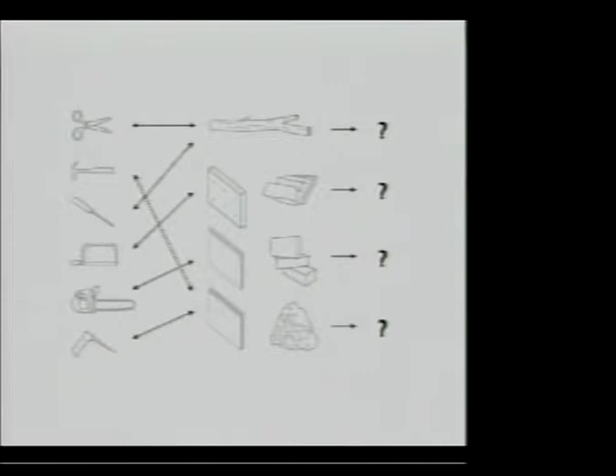So the way we're working, and this diagram kind of illustrates this idea, is looking at tools, new tools, both analog and digital, and looking at how tools might affect materials, whether that's raw materials or pre-manufactured materials, and how that might inform or lead to an architectural conclusion.

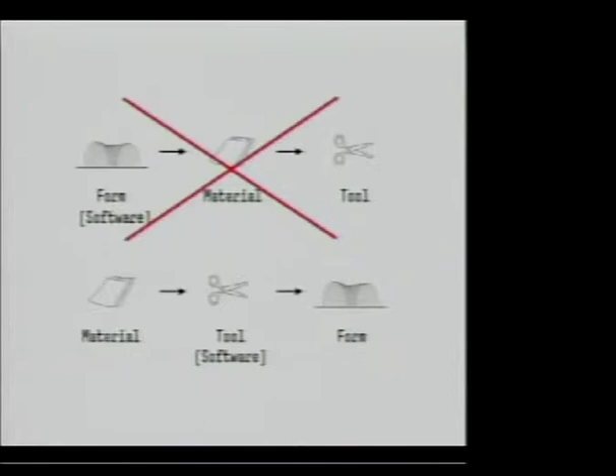When we came out of Harvard GSD in the late 80s, early 90s, software was really very much about using it to make form, and somewhere down the line there would be an idea about how that would be materialized, and then what tools would lead to that. So in more recent years, we flipped that equation: we'll begin with a specific material, look at tools for transforming it, then relocate software in that position, and see how that might formalize or lead to a spatial result.

One of the places we started working in the late 90s was for the Trumpf machine tool company in Stuttgart. Trumpf is the leading machine tool company in the world. Their idea was to use lasers, specifically for cutting and shaping sheet metal. So while we were master planning for this company and building individual buildings, some of which I'll talk about a little bit later, we began to look at their technology and how we might apply that to producing architecture.

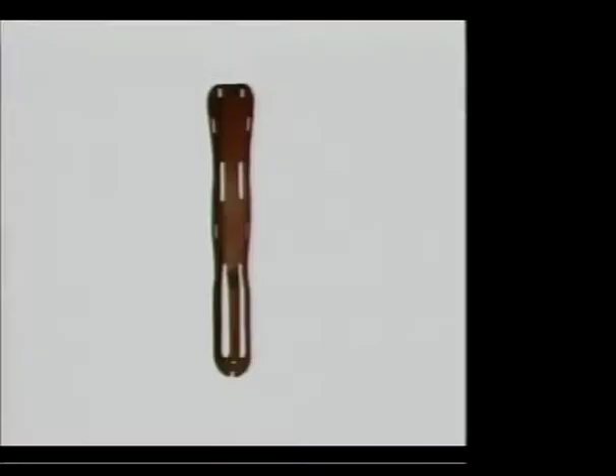So in this case, this is a 5-axis laser cutting head. It's cutting a gas tank for an Audi. So we were wondering, are these machines that we could start to use in terms of producing initially architectural components and in later years more substantial cladding systems, structural systems, things like that. This image of the Eames splint here was a kind of project that we always like, and we show this often in lectures.

You'll probably know from your history, it was the Eames splint. It was developed during the 40s, during the war years, out of the relatively new technology of plywood. Plywood could be formed to produce the splint. But in a way, this piece set up the rest of their entire project in terms of producing furniture systems for the 50s and 60s. So this we liked very much.

Again, I think the way we work in the office is, we're working with students, but it's, I would say, relatively flat hierarchically, where students will come into the practice, will bring software skills, scripting skills, parametric issues. We're looking at ornament, geometry. And again, as a kind of evolving practice, we're constantly looking at technology, looking how we use it. So in that sense, we're very much open-ended in terms of how these might work or be used within our practice. One idea that we start doing also with students is this idea of active archiving.

So what active archiving was for us was, rather than relying on, say, building catalogs for our work, we started producing our own architectural building systems. A couple of years ago, we had a show at the Architectural Association in London called Atlas of Fabrication. It was a catalog for the show, and at the same time, it was an exhibition showing some of these techniques, some of these components that we started to produce. So the catalog itself is a very simple document, basically stapled together, where we could add some of our systems into it.

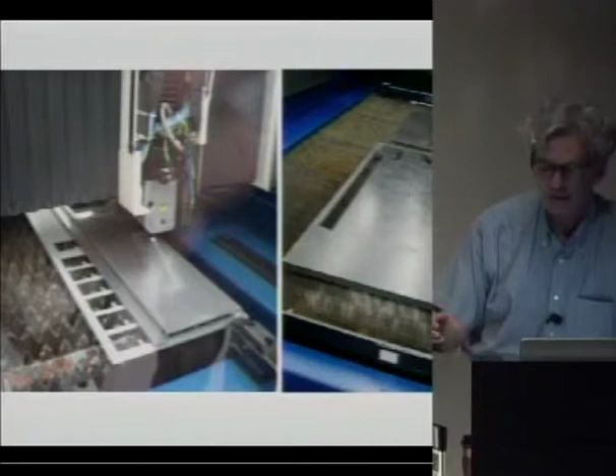So, and I'll go through some of these examples fairly quickly, but another question was, in looking at these tools, we would send, in these examples, students down to Stuttgart, where they would look at a particular machine, understand what that machine could do in terms of a kind of action on a material, in this case, cutting, stacking. The first machines are fairly fundamental, where they're doing two-dimensional laser cutting of sheet metal. With these machines, in a sense, we would study these, see what the capacities were, how fast they could cut, the economics of using these tools, and then to apply these to a system.

So, and these first examples are relatively simple moire screen systems. We began to apply digital scripting to these surfaces, where there's this idea of a system that can be repetitive, at the same time have a certain amount of variation in it. So at this point, the scripting is fairly naive. It's simply producing almost what I would call kind of ornamental pattern making that we could start to think about in terms of architecture.

Another thing we work on in the European scene, I guess, is architectural competitions. We're constantly doing architectural competitions. At the same time, win, lose, or draw, we like very much the idea of having particular research projects as part of the architectural competition. So in this case, we had an empty site over here in Dresden. As you remember from your history, Dresden was this beautiful Baroque city that was largely destroyed during the Second World War. It was a city built of a very beautiful sandstone. So the idea was to, in a way, reconstitute a historical form in the site of this Gewandhaus near the center of the city, but tectonically to think of it very differently in terms of how it would be built, the physical walls of the project.

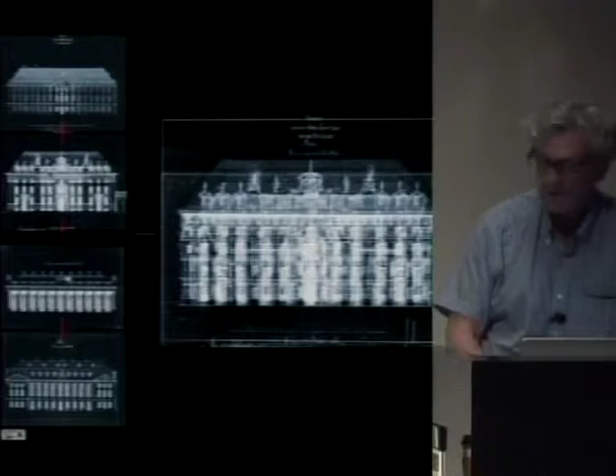So the exercise was, we basically looked at all the proposals for that site from the last 200 years, which are these guys on the left, and then sort of composed those into, on the right, this kind of composite form, which became the proposal for the scheme.

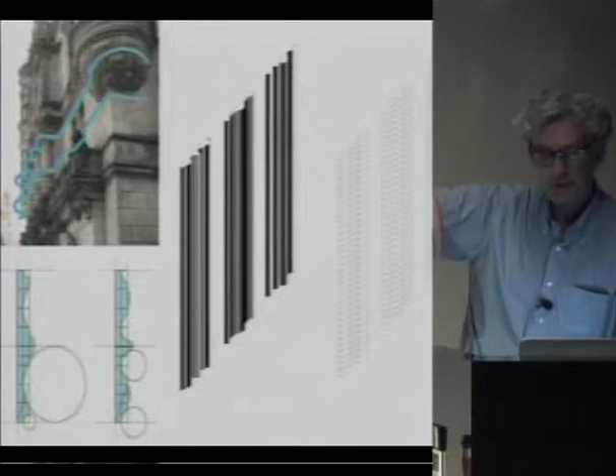I mean, something we also like is, in a sense, an idea for generating an architecture on the site that's not something we simply drop into a site, but has to do with the history of a place like that. We looked at the surface profiles of the Baroque walls in Dresden, and in the lower left began to look at these templates that could be a stacked wall surface.

So the first studies were of these kind of Baroque but relatively abstract walls that could be made almost like a series of louvers of digitally cut stone or concrete that would stack to form these kinds of walls that then later could constitute the construction for the building itself.

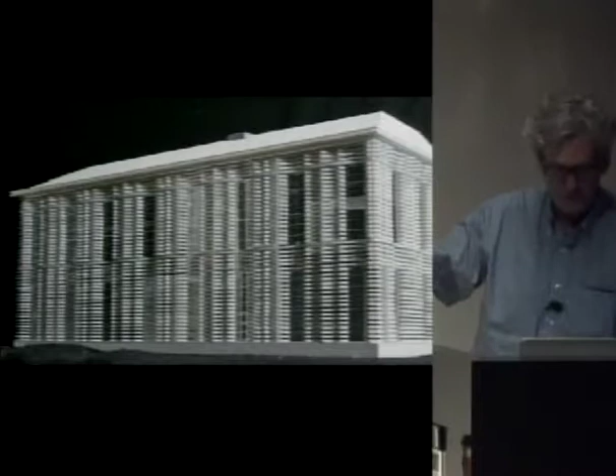So the building itself, again, is sort of both familiar and unfamiliar. Familiar as a historical form in this historical city. At the same time, it can appear completely opaque or completely transparent through this kind of louver system of wall making, using our research to inform the making of this project for a competition proposal.

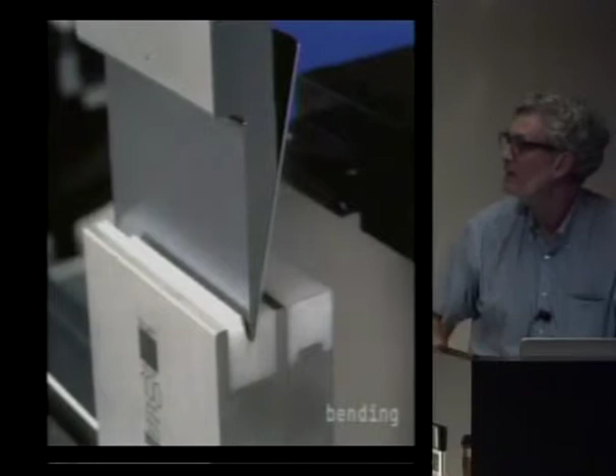Another area, and this has been around for a long time, is bending. Bending is an old technique for shaping metal. Like many of these other things, it's now a digital process where, again, these are MIT students. They had discovered with a limited sheet of metal about this big, they could get a certain amount of folds. Those pieces then can nest into larger arrays or matrices of surfaces.

Again, completely independent from any particular use or client or utility or even economy for using these, but just trying to understand how we could use this machine to produce a surface like this.

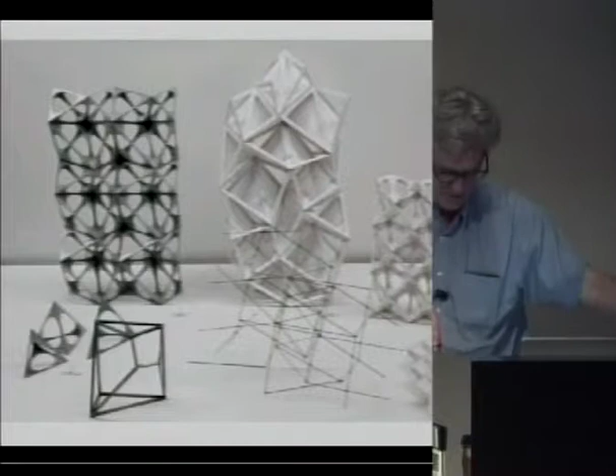This piece then later became part of a research project, part of another competition in Zurich for the Kunsthaus, which is the addition to their modern art museum, where we were really interested in revisiting the space frame as a kind of structural idea for facade making. Now, space frames have been around since the 50s and 60s.

Now, digitally, a space frame could be something that could vary, it could change in relationship to structure or daylighting criteria. So, in a way, again, this was the research project within the competition project, and we started to produce these in our workshops, digitally cutting these, and then assembling, and then bringing structural engineers in very quickly to start measuring these systems to see how they might apply.

Ultimately, this was a proposal for a curtain wall at the museum entrance, where you have this kind of interstitial space at the entrance, which has its own climate, different than the galleries, which are stacked to the right, in terms of humidity and temperature and all these things, as a kind of wrapper and envelope around the entire space, which ultimately in the final version became a concrete precast perforated surface that wrapped around the entire building.

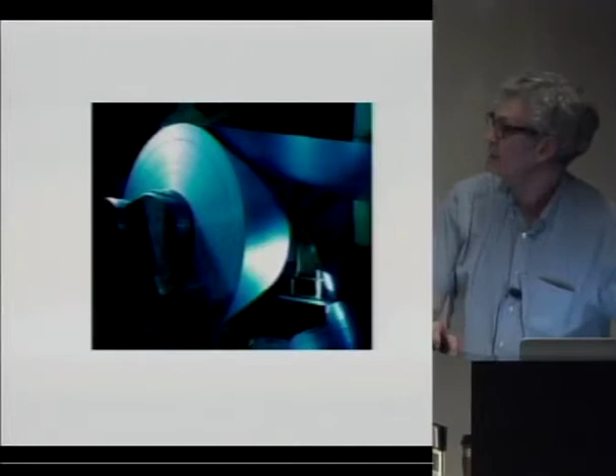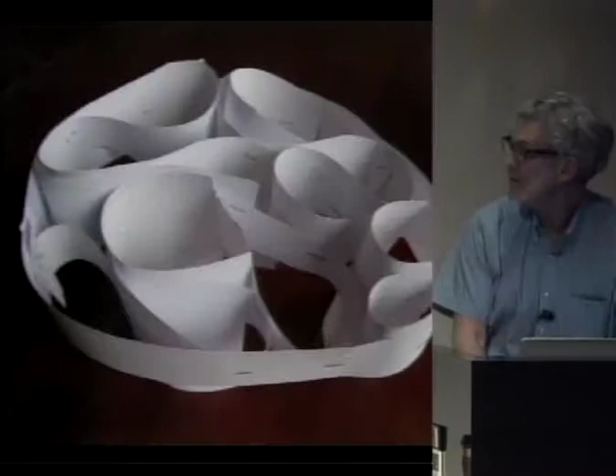And other studies, and some of these were started also with students, were, for example, the discovery of meter and a half rolled sheet metal that by simply looping the material and fastening it by welding or riveting, we could produce a kind of architectural pavilion.

So in this case, by making more dense coils, you can get a much stiffer structural roof. It can get larger and drop out as these kind of structural columns. We even combined it with a kind of curtain wall of plexiglass, which follows that.

But again, looking at a particular material, then looking at a technique for, in a way, organizing or collecting that material, that for us had a kind of logical process in terms of leading to a system that could be both structural as well as having an idea for lighting a pavilion space. Again, completely independent in this case from any particular site or program, developed as a kind of prototype.

Another example, here we're working with a Swiss structural engineer, Jürg Conzett, and Jürg's idea was to use structural depth. In this case, this is a large box beam that can bridge from left to right with these kind of squiggle walls, which are a webbing.

These would be cast in a digitally shaped concrete formwork, and the height of that box beam, which is about 3 or 4 meters, then could be used as loft spaces or office spaces, again a structural idea, but of a kind of dimension that you could use as an architectural project.

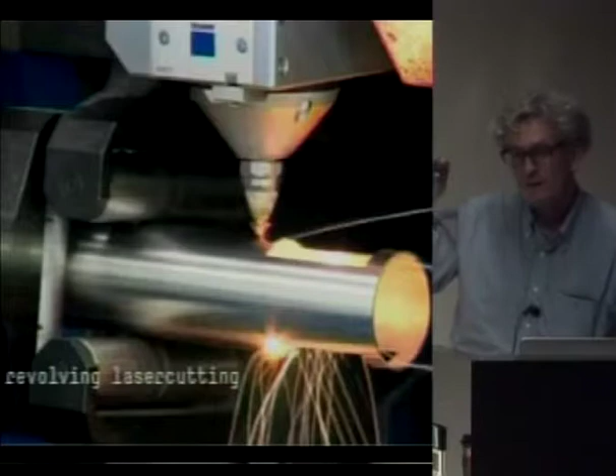Revolving laser cutting is relatively new technology. I really like it because all of a sudden now you have a three-dimensional, off-the-shelf piece, these tubes which can be rotated and then fed through a machine and cut. The first pieces were these highly intricate work pieces. We could cut multiple pieces from one tube section and just ran these to see how precise we could make them, how quickly we could cut these things. Again, independent from any particular use for them.

Another area that we're working in is this idea of the architectural exhibition. And we like architectural exhibitions a lot because they're sort of in between the research work and the building projects we're doing. And what's kind of nice about exhibitions is, unlike a lot of our contemporaries, we're not really working in shows that are about showing drawings and models so much, representation, but more really about using them for architectural installations, so that they are forms of architecture in their own right.

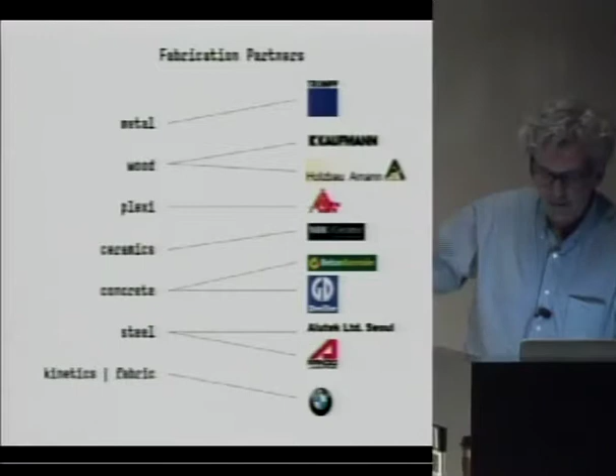With those institutions we started working with, we had begun with Trumpf at the top as a fabrication partner, and in the meantime, we keep collecting new partners, new workshops basically, that work specific materials in specific ways. It's an evolving collection that we keep adding to for working on these projects. A lot of these are around where we're based. We're in Berlin, which is, I think, marked at the top. Between Berlin and Zurich, we have about 12 or 14 of these workshops that we work with continually, depending on what the project might be.

So this piece, which is kind of a sculptural piece, had an idea of rotating these tubes in this array, again thinking about an application which ultimately became this. We ended up putting the tubes in a project for a showroom in Sweden, where by rotating the tubes you could do a number of things. You have this visual effect, a moire effect. We started looking at it in terms of exterior sunscreening, which is what we do in Europe a lot. We could look at the transparency or opacity looking into the interiors of the showrooms. So for us, that was a logical series of steps in terms of looking at a tool, a material, and how that might lead to a more inclusive architecture.

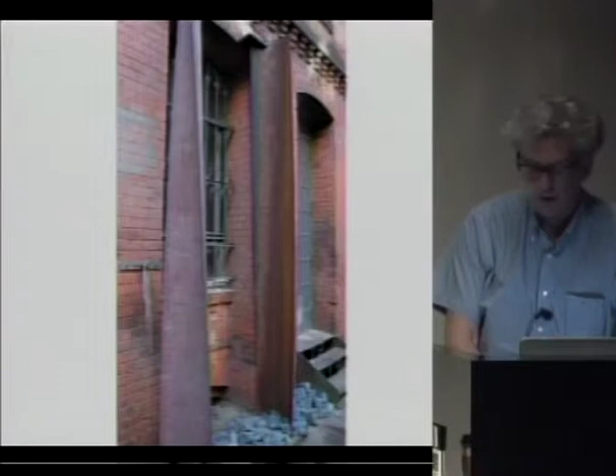Then we started producing these in our courtyard, our studios, out of Cor-ten. So we cut 3 pieces from each tube. These would go up 22 meters. But bring the client to our studios, show him these things, tell him where they could be cut, how much they would cost, how long it would take to make them and deliver them to the site. So in a very precise way, for a system that is essentially unprecedented, show how we could use this and apply this to an architectural competition that, in this case, we actually won.

The prototype as an experiment, I think, comes back. This is one of our student projects from the AA in the late 90s. This idea of a search for an architectural prototype that comes from a technical system. And I guess this is kind of a fancy way of simply saying that for us, design follows technology as we discover it and find ways to use that.

Again, a lot of this has to do, like in some of the earlier examples, with the engineers that we were working with. These are a lot of English and German engineers that we work with. Also, and I think to say up front, we'll usually start a design process with our engineers at the initiation of a project rather than something that happens further down the road.

A couple years ago, we were asked to do a pavilion for the German Architecture Museum, a temporary pavilion in their garden space. We teamed with Werner Sobek, a very talented structural engineer in Stuttgart. We discovered by scroll cutting these tubes, you could have very complex radiuses. He said, if you want to make a kind of arch out of these things, it's really a terrible idea because these are like limp noodles, basically, and don't do anything. But he was recommending that we could do digital bending to produce these forms with a simple bending machine that's digitally guided.

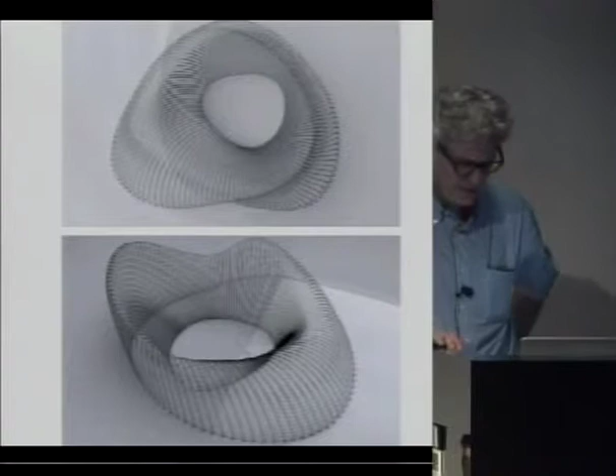So with our students, we started looking at different proposals that use a specific size tube that can be radiused in a certain shape that could produce these pieces where each arch could be a unique piece in the array. So we ended up settling on this one, which the curator picked because of its flexibility and the kinds of exhibitions they could have in it for 6 months.

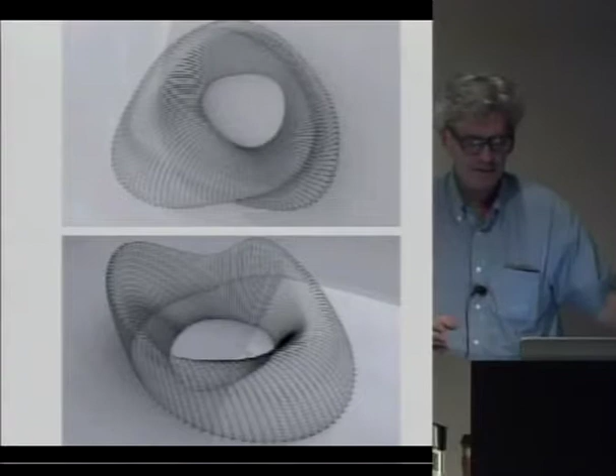But it's also, I think, the pavilion, and we've done several pavilions with students, is an interesting type as an experimental typology. It's fairly open-ended programmatically. They're usually temporary, but we looked at a number of these in terms of more architectural and experimental building typology.

So in this case, we had a kind of primary and secondary structure that would hold it together. With Sobek's office, we started to look at a shingle for this. Using scripting, I think we limited this to about 12 different shingle types. They clad over this arch. So even though the recession came, we ran out of funding, the Deutsche Bank pulled out of this, but we were still able to build the pavilion inside the Architecture Museum and show it, in this case, as a one-to-one mock-up.

So here you see these Makrolon, which is a kind of synthetic plastic shingle. They overlap so that in the summertime the pavilion is ventilated. We could silk screen on these surfaces to give more sun screening, and we could also embed photovoltaic cells in this to generate energy for the pavilion for the 6 months.

Then even in the course of the weeks that we put this thing up in the museum, we were improving details. Like this is a simple wire connection to the arch, which we then attached a Velcro connection. So you could take these shingles and just sort of pop them up and onto the frame in a very, very quick fashion.

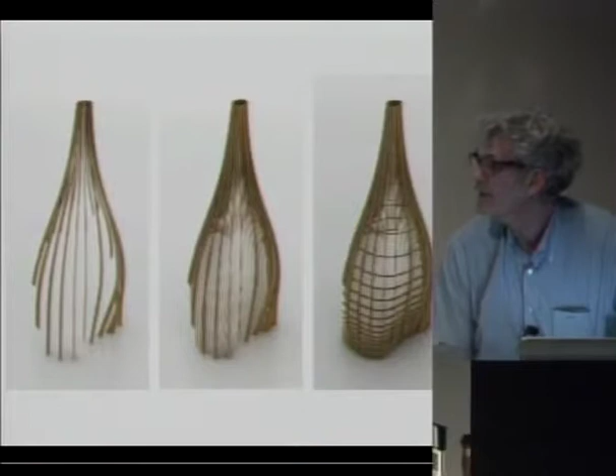In this case, we looked at the Norwegian wood industry, which is a really fantastic material. We use it. It's a really very good sustainable material. It's easy to work. In this case, the sort of core cell piece is a series of wood ribs. These ribs can be added with secondary pieces. We could make entrances into these spaces. We could use the structure and then clad it.

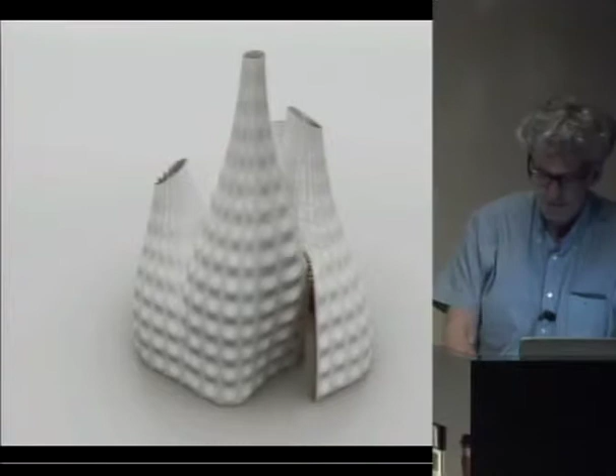In this case, this is an ETFE. These are sort of these membranes of a kind of chambered plastic membrane that wrap around these things in terms of insulating and also conditioning the light that comes into these.

The rib system we were able to use for displaying some of the artifacts, some of the pieces that Cecil was bringing into it, as well as daylighting the spaces, and then finding a way where we could, as a series of modules, every year, add a new cluster to this thing until it's all essentially built out in 5 years. So again, looking at the pavilion as a type, in this case, to look at wood construction and how that might contribute to building that.

The second half of the lecture I wanted to talk about was our work at a kind of building scale. This idea of a research practice. This soundbite from Icon magazine from a couple of years ago was the idea and the kind of desire from our point that the work we do, and the work we do is really sort of everyday office buildings, factories, cultural buildings, but the idea that the technology that we're using is something that we can use in everyday kind of construction situation. That means economically as well as practically on these kinds of projects.

So if this is the way we've been working in terms of research as related to, say, things like exhibitions, to buildings, ultimately it's our building projects that are conclusive in terms of discovering ways for using this kind of technological research. So in this example for smart materials houses, we wanted to look at how we could use material research for the production of low-income housing for an IBA project outside of Hamburg.

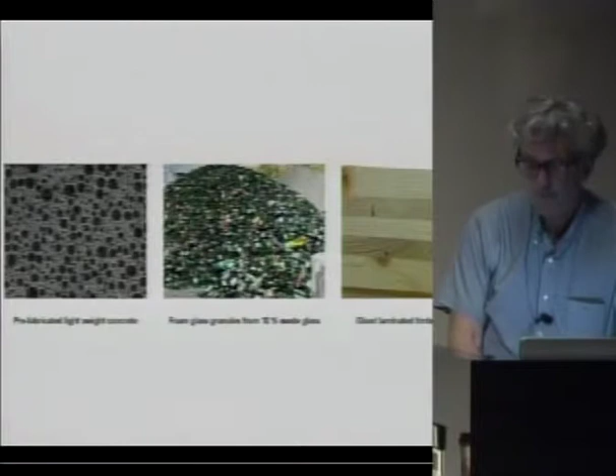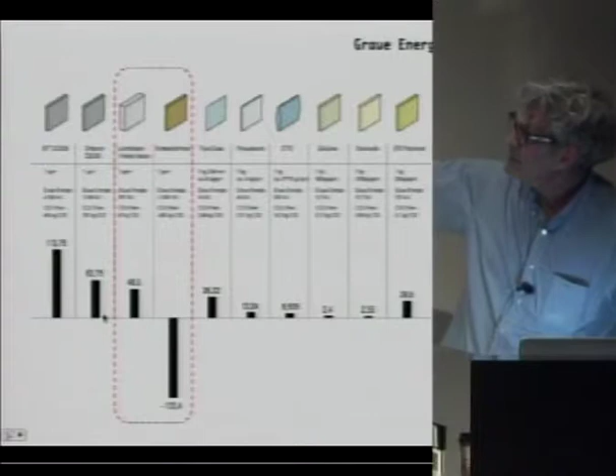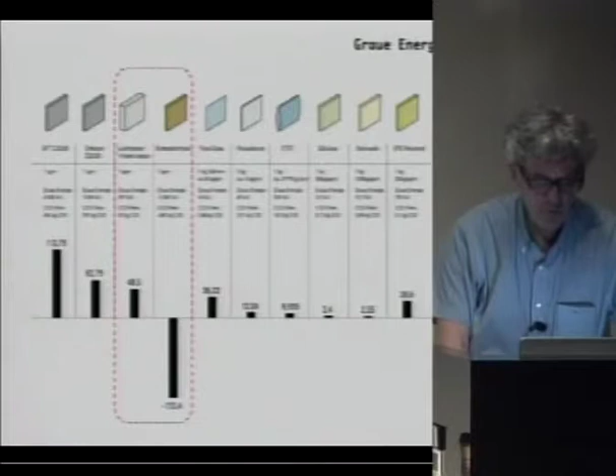So this kind of CO2 chart was a way that helped us construct an argument for which materials we wanted to use. So if you look at the concrete we use, and if you can't read German, you can see that it's about a third of the CO2 of regular poured in place or precast concrete, and then with this sort of minus CO2 use of the wood in combination, they were a pretty attractive couple of materials.

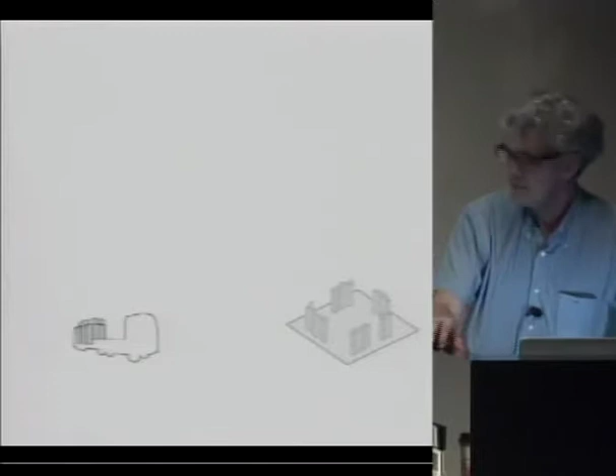The other idea about the apartment building that we liked was the fact that it could be constructed really quickly. You could bring the pieces on site, almost like a house of cards, and within a couple of weeks have the entire system constructed.

We liked also, working with our energy engineers, that if you're going to work with concrete, it might as well be expressive. It's a very plastic material. It can be shaped in a very sculptural way. So because of our earlier fabrication work, we knew we could make formwork that in this sense is kind of a scalloped surface. You could produce a form.

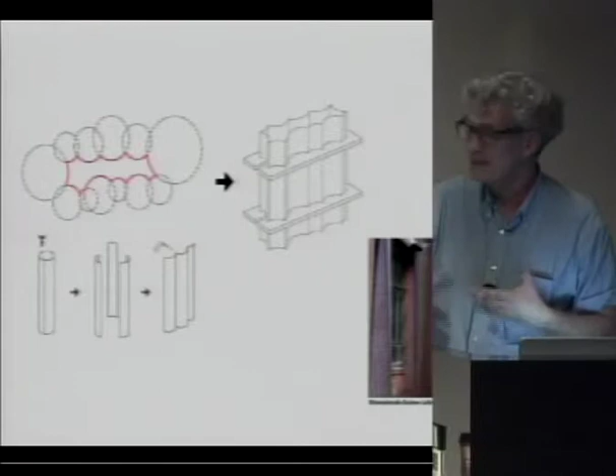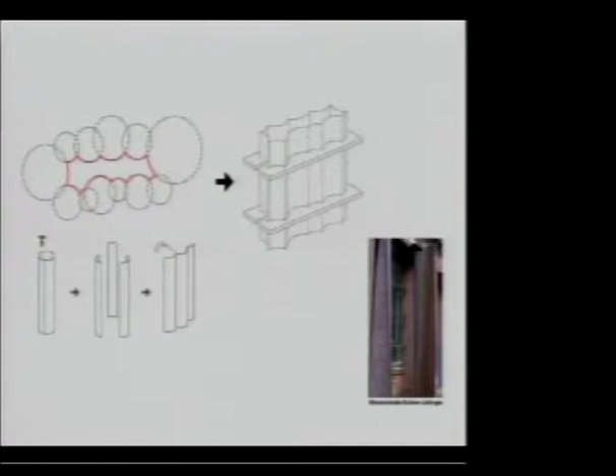And because the material is homogeneous, there's no finishes on it. It's not a sandwich system. You can make one type by pouring like this. By flipping it on its head, you can have a different type. You have different types by pouring the concrete higher and lower. And that would produce this component, this concrete piece, which is very much this kind of multitasking element.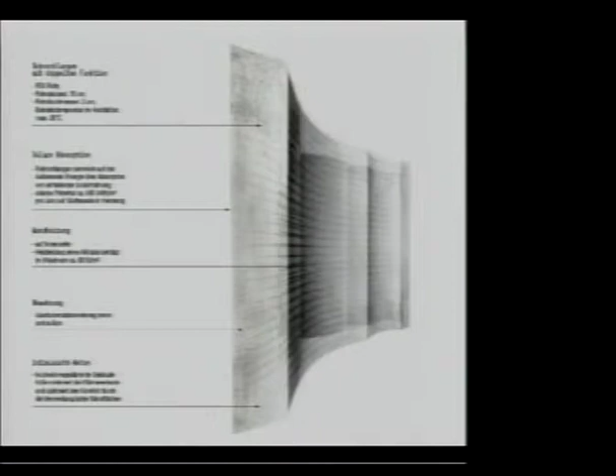It's pure infralight concrete. The finish can be the inside or the outside. We put a series of conduit in it, which has hot water or cold water flowing through it. So that's the heating and cooling system for it. We formed it so it was a self-supporting element that could be stacked on each other. We didn't have any of these sort of German cold bridge problems with the insulation of it.

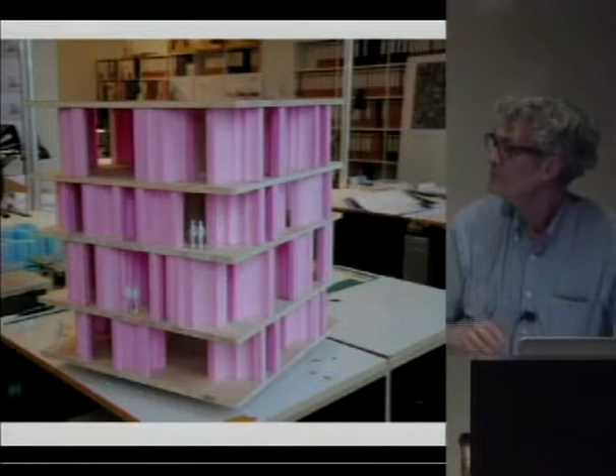And then in our shop we started to build these models in 1:20. In this case, we took rigid foam, which you can cut with a hot wire, and then combined it with these plywood sheets. So in a way, the model duplicates exactly how we would construct these in reality by simply stacking these pieces up.

And because of this aspect of it being self-insulating, the facades can move and shift over as long as structurally they align with each other and the loads come down. We could do a very dynamic facade in relationship to the floor plates to generate exterior spaces along the perimeter. Again, these are these kind of little pocket terraces on the outside.

So you have a core, which is wood, also on the interior. The units can be organized as open loft spaces, or they can be divided into more conventional sleeping rooms, living rooms, kitchens, and could sell for a very low price to the people who live in this community.

It was an idea that we went crazy with, and we tried an even crazier version of it in this version. In the last year, we discovered that you can build, probably in Holland and definitely in Austria now, high rises up to 20 stories in wood construction. So we thought this would be an amazing idea if you coupled the wood construction with the infralight concrete as a kind of stacked system.

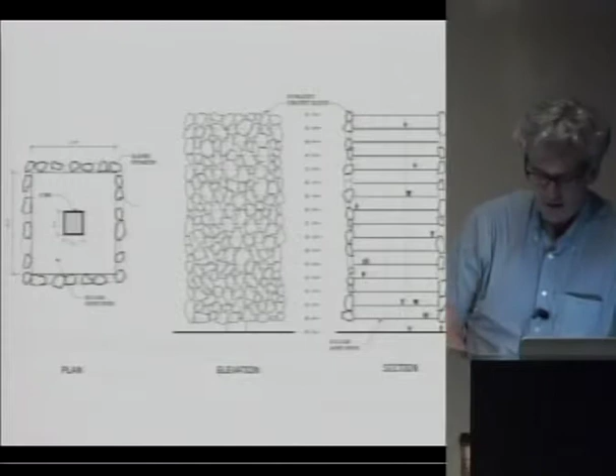The idea being that these blocks, you could just sort of bust them off and bring them down to the site and then begin to stack them and then connect them into these wood sections. Because the material, again, the thicker it is, the better the insulation quality is. At the same time, we're really interested in the idea of how it might affect the daylight coming into this deep building section as we're showing here.

Another idea that we looked at for an infill project in Berlin was another structural idea, also working in wood construction, of a kind of catenary idea where these are work-live units where the box cells work as a catenary structure, which is this kind of chain idea. So the slipping has to do with that structural friction between those.

What was cool about this project is by bridging that space, you would get essentially a completely column-free space underneath that, which could be used as a workspace. So we can develop something like this and then look at it as a kind of development project for a kind of empty site in Berlin with two party walls on the left and right. And this is a kind of insertion project into something like this.

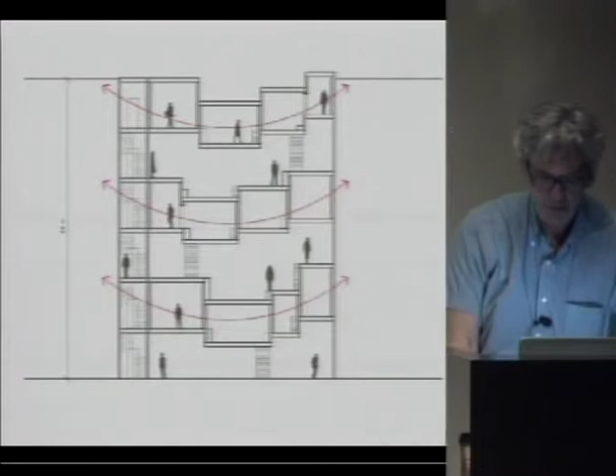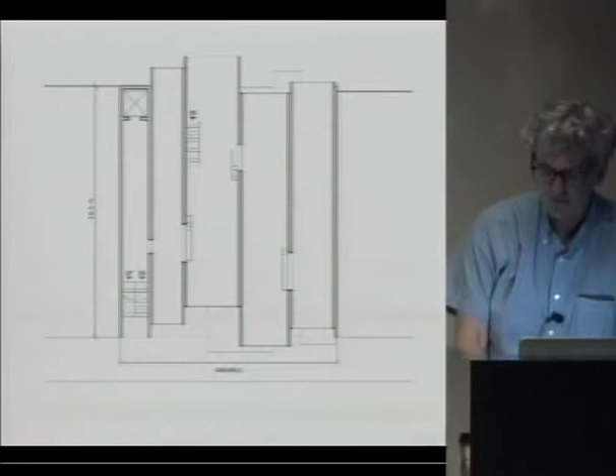So in this diagram, this is showing the structural, this sort of bridge hanging idea of the kind of residential bits sandwiched in between the open working spaces. So again, a kind of structural idea, material idea leading to a prototype that could easily fit, also by definition of code and exiting, into a site for Berlin.

The last few projects are construction projects. Trutec Building was a piece we did in Seoul in Korea. We'd never worked in Asia before. We've been used to doing these competitions in Europe. The context we knew very little of.

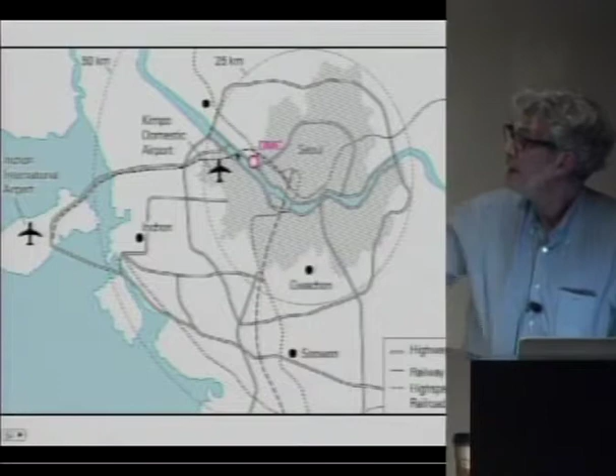It was in one of these last development sites in Seoul called the DMC at the north part of the city. Seoul, as you probably know, is this very heterogeneous city of high density, low density. It has this pretty dynamic landscape that's rolling through it. This amazing sort of crazy graphic image of the street by day or night.

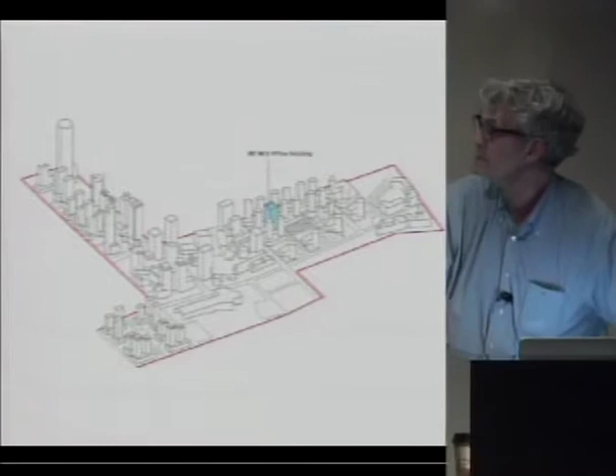They're a 24-hour city. And what happened is we inherited this site within this kind of master plan that to us was generic. Not much of this had been constructed. For us, it was difficult to see how we might work into a site that for us had very little context.

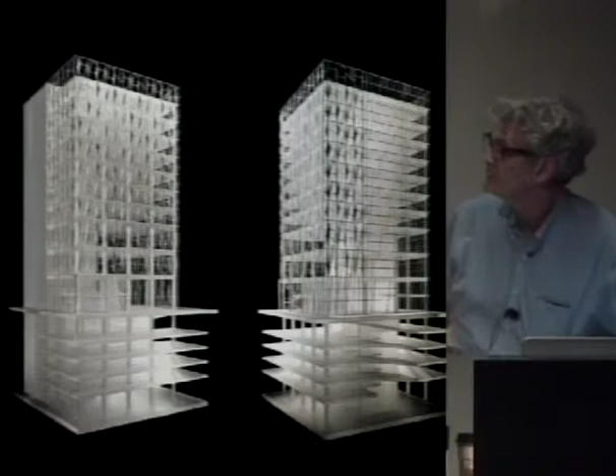The building itself is fairly straightforward. It's a shell and core building. This is the facade wrapping around a steel construction. Part of it's underground. The core is off center and pushed to the corner. The facade is almost like a lace. It wraps around the building and it continues above to create a roof garden in this site.

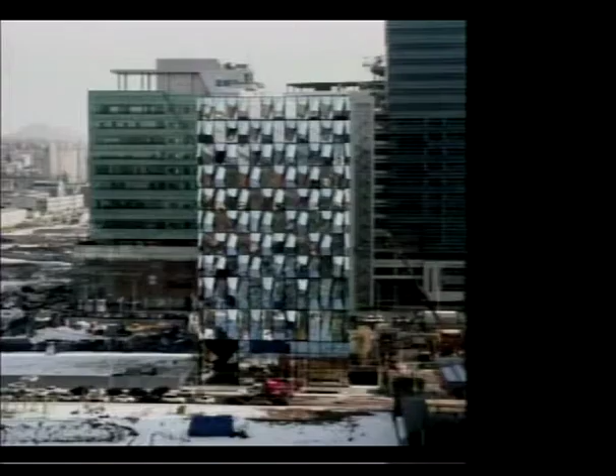So this is the building where, again, you see the city being literally constructed from right to left. These are building sites that have now been filled. But the building would, in a sense, mediate between the buildings, which are these kind of not too bad modern buildings around it, between this very, very public exterior and a very private interior for offices for German tech companies and showrooms at the lower level.

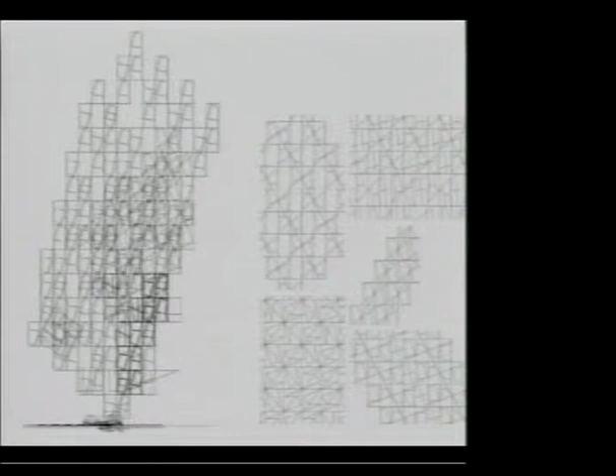In order to produce this facade, which again is really the architectural emphasis of this project, we looked at different patterns for glasses, limits of glass sizes, started with a facade grid, added diagonals. We started looking at 3D elements, sort of faceted elements versus 2D elements in terms of balancing the economics of this and the buildability of it.

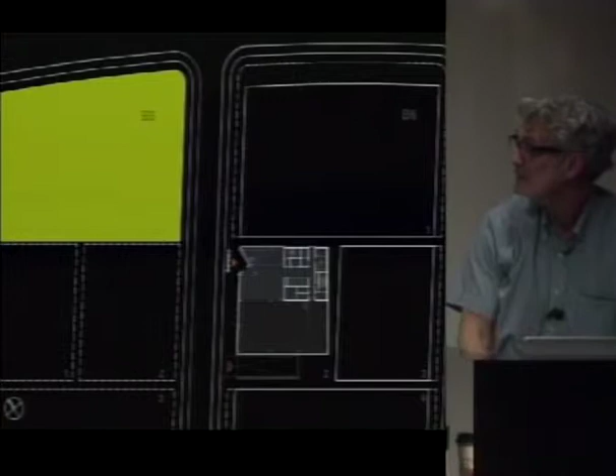By taking one facade type, we could flip it on its head to produce another one, and then by combining that with two-dimensional flat facade elements create this really, really complicated facade. The building itself is at the showroom entrance level, diagonal to this park to the upper left. And again, the core is kind of pushed off to the end, the back, where there's very little light.

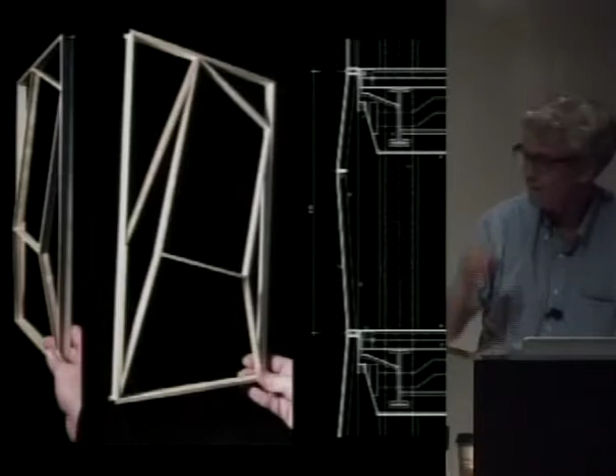So in the building section, you see that facade is, again, operating at a very flat depth of about 20 centimeters. And then this bigger indentation at the bottom is where the entrance to the building is. We were trying to figure out this geometry. At some point, it just got crazy, so we just went to the shops and started building this out of plywood. So on the left is just a model about this big, so we ourselves could understand better how those connections would actually work.

The interiors work kind of like open loft-like spaces, so the interiors are these sort of, again, like a lattice screen to the interior. Each individual piece had its own kind of kit of parts in terms of glass sizes. All the glass was cut by Viracon in Minneapolis. It was then shipped to Korea.

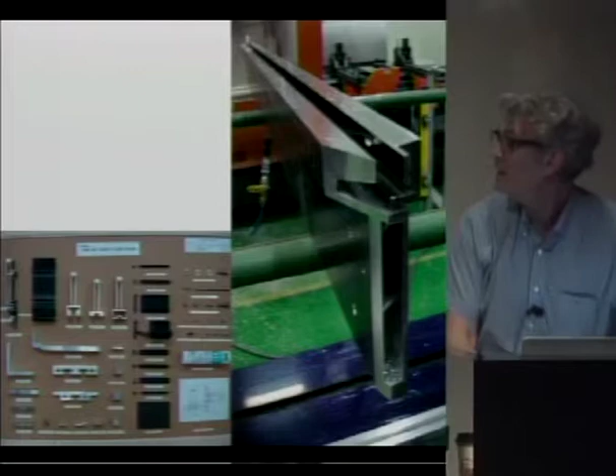They bought the machine in Germany, taught themselves how to use this, and then coupled the profiles with these joint stiffeners, which kind of controlled the geometry, and then began to fabricate these pieces close to the site. So it was a great process in the sense that the Koreans had no idea how to do this, but they were totally ambitious to learn how to do this and to produce a building like this. Because we needed help, this is our engineer, Jerry, who came over from Hong Kong and ran workshops with these guys to produce these pieces.

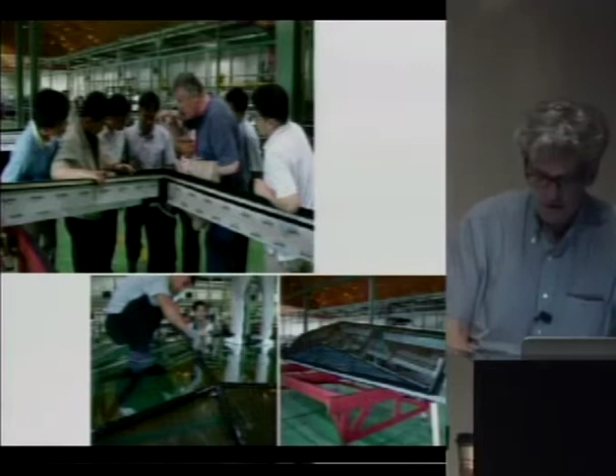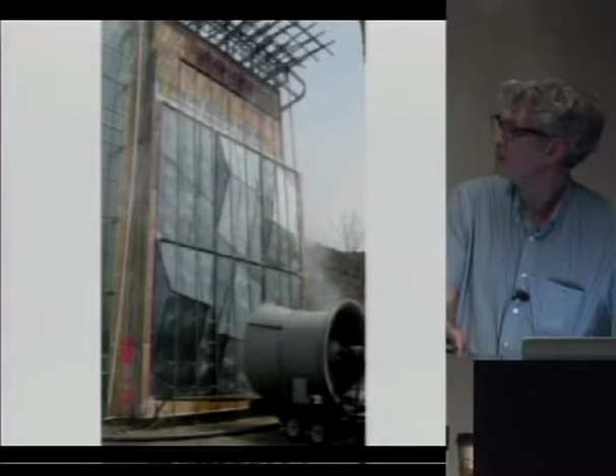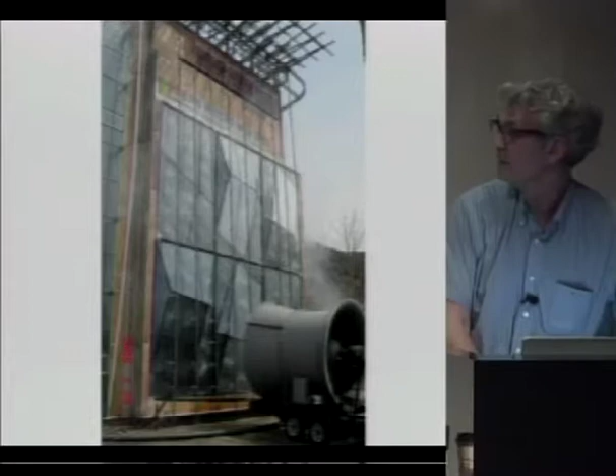So a corner piece in the lower right, very complex piece, but at the same time, in a very low-tech way, these guys are caulking the silicone joints by hand to produce each piece. Again, unlike some of the research work before, we needed to prove the system was sound in terms of waterproofing, in terms of wind and rain. Blasted this in this kind of provisional wind tunnel here. It worked. The client gave approval for the project, and then we were able to go into production.

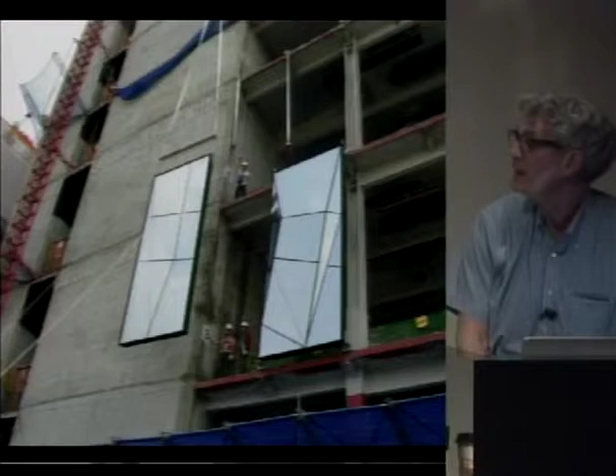So these are the pieces being staged on site and then being lifted into place and then bolted into the concrete frames of the building in a very, very quick sort of process of building. From the exterior, it's a low E reflective glass. From the interior, it's either a clear view out through these or through a kind of shadow box profile, which is these translucent pieces in the more complex geometry of the piece.

Again, at the end of the day, we weren't really so interested in the pieces themselves as a kind of architectural tectonic, but really how the facade would change over the course of the day in terms of reflectivity, transparency, opacity, how it would change by day, by nighttime, how it would even be affected by buildings that we had no control of. A local building across from it has LED advertising, which also somehow becomes captured and part of our facade system.

In the film here, you can see the facade responds to people walking by, weather, traffic, even these insane window washer guys dangling from this thing. So in a way, it was really about the whole phenomenon, how that facade would behave and change over the course of seasons or a 24-hour cycle, all that stuff. So it was really less concerned about the physical materiality of this thing, but actually the visual effect of the building.

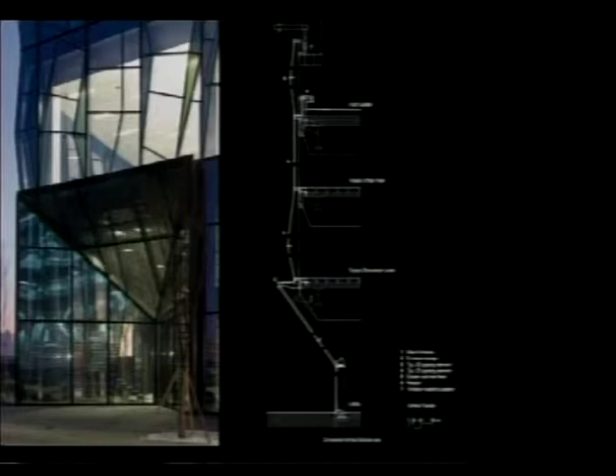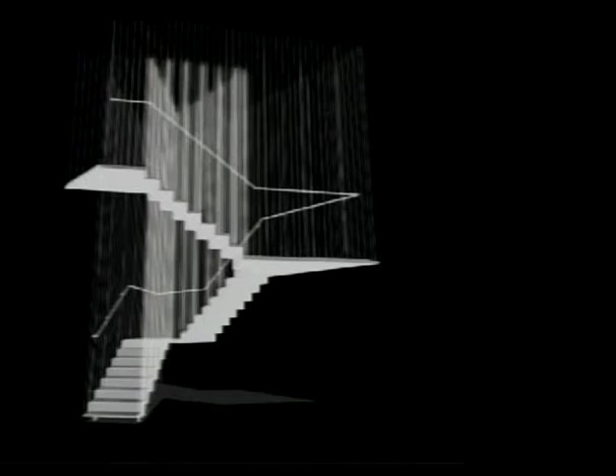Other engineering components: one was these huge barn doors we produced on the upper levels to bring machines into the display rooms. The entrance was also a special piece that we engineered and fabricated and dropped in, as well as the entrance stair, which is this triangle shaped piece in the plan. Working with Schlaich, our structural engineer, we really liked the idea that the stair could be almost like a marionette, suspended by these steel cables from the roof of the double height lobby.

So here you see that, as constructed, the stair itself is a ribbon of welded steel, which makes it stiff, and then it's simply attached to these steel cables, with a wood version on the interior of our exterior facade that we did in glass. So we finished this thing in 2007. Six months later, a boutique in downtown Seoul copied our facade perfectly. They even improved it, I think, in terms of its construction. Both completely horrifying us and I think flattering us at the same time. But you have to be quick on your feet there.

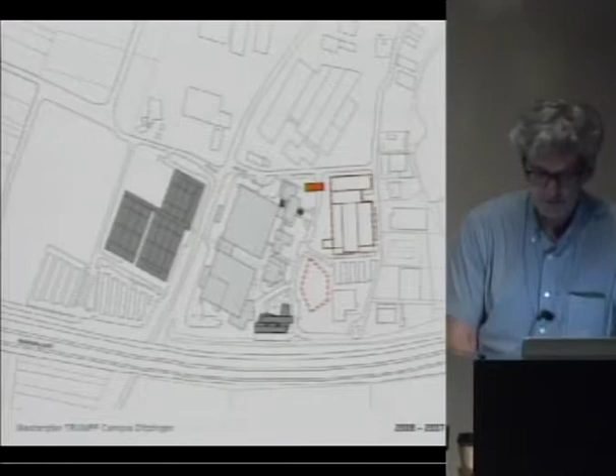These last two projects, which happened at the same time, go back to the factory which I showed you in the beginning in Stuttgart. A factory is constantly being added onto, adding new lands, adding new acquisitions. In this case, what used to be the back of the factory became the front entrance. We developed a gatehouse project here, which for this company was fantastic, because finally we had a building type which we could really pull all of their technology into in terms of developing a building project.

In engineering this also with Werner Sobek, we had this gatehouse project, which is very simple programmatically. It's a kind of information point, a control point for visitors, for the employees who work here. And Sobek said, well, let's see what happens if we just take the columns off the end of this thing and just let the thing cantilever out 20 meters. So, okay, great, sounds good. Let's try it. So this is the last column here. There's 4 columns, 2 here in that row and 2 back here, and then this thing goes flying out over that.

In order to do that, or one of the ways we started thinking about this was these guys were producing these at Trumpf, these decks that were laser cut, laser welded. They can be used for tabletops. They can also be used for things like ship decking. They're pretty light and extremely strong.

So one of our ideas was, well, can we just scale this up to produce a dynamic roof like this? So this is an early quarter-inch model that we produced with the roof hovering out over this thing. The roof's about 60 centimeters, so it's that thick. At the same time, from Werner's office, we started inheriting these kinds of vector plots that he was showing us to show where the loading is.

So where it's blue is where the compression of the roof is, and then in the back, you see these kind of ghosted endpoints. Those are the columns where the roof is in tension. So we always love these kinds of images, and we were curious about making this stuff legible in the process. So we started in a kind of a dumb, naive way to produce roof patterns as a kind of truss that would register that logic through a series of coffer elements in this truss roof that would change.

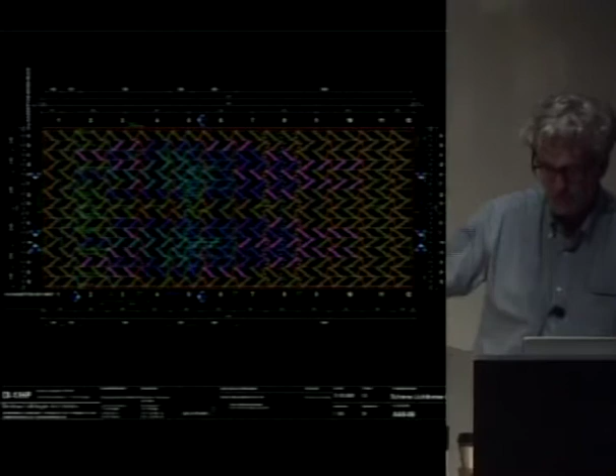So in the final version, and this is the model also being laser cut, similar to how we built it in real life, it's extremely light at the end of the cantilever and then becomes more dense at the connection points to the columns. At the same time, we were looking at ways of integrating lighting into the system so it could work on a 24-hour lighting cycle, building mock-ups in our studios and looking how, say, the light might work, and then going back to the old one-to-one mock-up.

In this case, to show all the systems that would be in it, laser-cut pieces, mechanically fastened pieces. We had an integrated gutter into the system here. The webbing here is also something that varies in terms of its location in the roof. The roof is crossing this plan where, again, you have these column points here, here, here, and here. Very simple interior core, information, service, toilets, and then a double curtain wall wrapping around that.

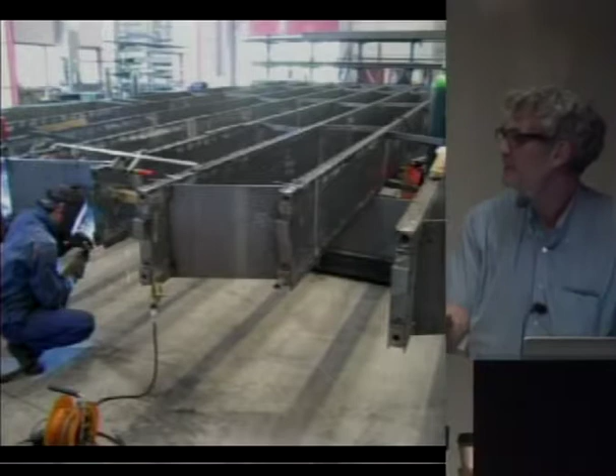So in the sections you see the roof cantilevering out over here, and then this kind of mega foundation in the back here for simply keeping the thing from tipping over. In building it, this idea of everything being digitally fabricated and produced was a bit of a fantasy. This is an example of an expansion joint where we just use simple old-fashioned welding to put the pieces together.

In putting the thing on site, we built these strips off-site in the factory, then shipped them on these huge trucks at 3 o'clock in the morning, and then put them on these kind of ribs that hold them in place. The columns are also up there, clad in a protective plywood. Then we ganged these things together, bolted them together, and you can see in the background these gurneys that you're lifting it in place.

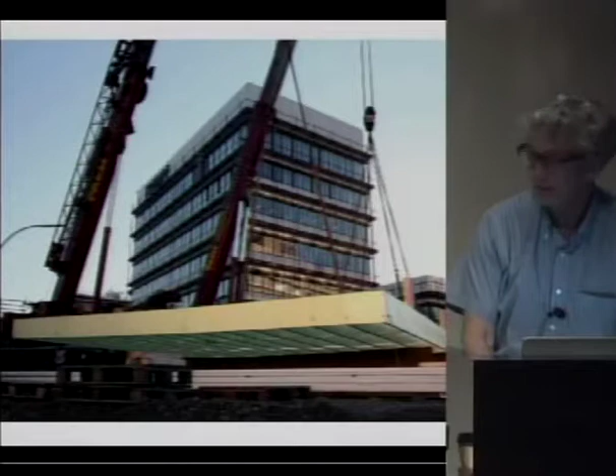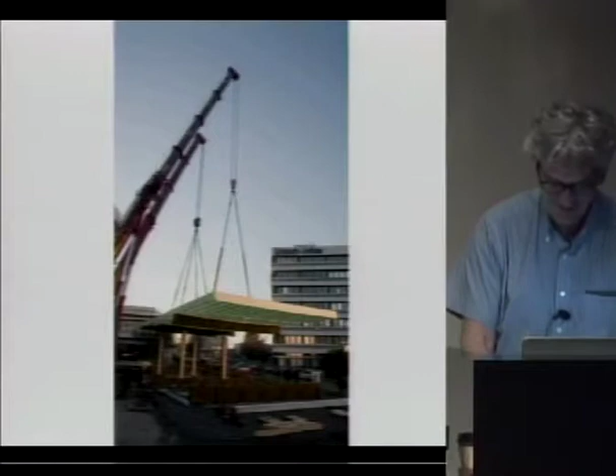So in this sequence, you're seeing the roof being slowly lifted onto these columns. Like 1,000 employees from the company come out to see this thing happening. You're at this point where you're really testing the difference between theory and reality. We dropped this thing in place, and then the roof kind of bounced a meter up and down, and then slowly lifts into place. And then we knew we were in pretty good shape.

We were still surprised at how dynamic this roof was. The roof is like a big ski that kind of goes backwards. It cambers this way, and it cambers this way. And then, as was intended with the structural engineering of this, by putting these sandbags on it, you post-load the thing, which then brings it into this perfectly flat surface that still had a little bit of adjustability. So again, we were surprised at how dynamic the roof was in terms of having to fine-tune that, which then produced this kind of effect in the project and lighting.

The other sort of project in this larger project was the curtain wall. Some of these screens work as a moire when they open and close. But we looked at a history of German garden wall making, where it was simple, just almost like firewood stacked between these vertical pickets. And then with these branches, we started to produce, I suppose, a kind of digitally drawn version of that. But then this guy really wanted to kill us.

We drew this thing, and then he had to glue each one of these things together with a capillary glue, and then lifted these in place by his crew to make these screen walls, which are, of course, ornamental, but also provided sunscreening for the space. It's a double facade, essentially, in 40 centimeters, where you have double glass on the outside and a single layer of glass on the interior that produced an entirely glass curtain wall.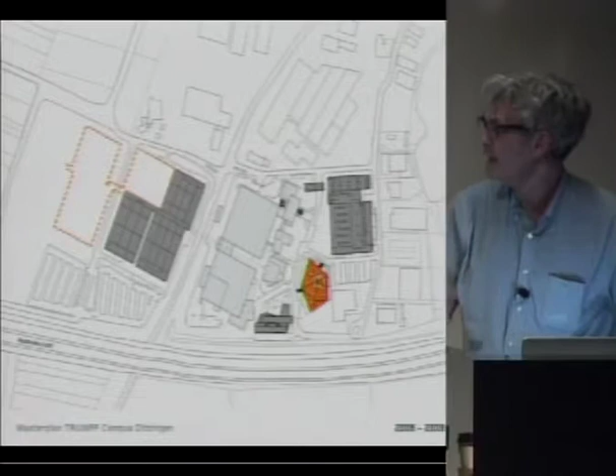In this last project, which occurred at the same time, the campus restaurant, also engineered with Sobek, was this building here. It was a different kind of building type on this industrial campus in the sense that it's not meant to be added onto as the factories in the back, where you can see they have been added to. It's kind of the social center of this campus. It's a cantina, a cafeteria that works in 3 shifts, but it's also an event space for them. They have musical events, parties, lectures there, and the entire campus is connected underground through a series of tunnels. So that was also an important way of looking at that.

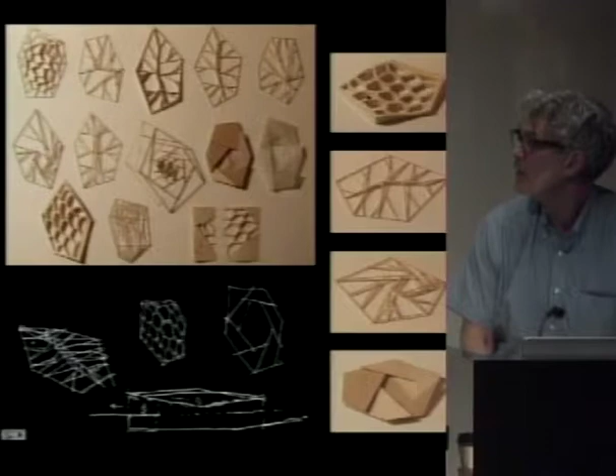We knew the roof was also in this project going to be a significant element, the organizational element for the building. So again, with student interns looking at structural hierarchical systems, leaf structures, we began to look at a series of study models, always thinking about a specific material. So this one would be about precast concrete. These spiral ones were about steel construction, and the honeycomb one was about wood construction. So we ended up developing a hybrid system, a primary structure of steel because it's really strong, we get really big spans, and then infilling that with this cell system of glue laminated wood. So right away with these study models, thinking about the roof as a fifth facade, as they would say in Germany, as a filter for conditioning the daylight into these spaces.

And then with our fabricator in the Black Forest, Holzbau Amann, we produced a performative mock-up at 1 to 1, looking at glue lam connections where we knew that each joint could be unique because of digital production and fabrication. Certain details we'd simply dumb down, like the steel connections are simply bolted through. They were pretty simple. This is Gunther down at Holzbau Amann. He draws with his right hand and left hand at the same time, and essentially redrew our entire project, every screw, every connection, and then put that into their hardware and software for producing these production runs.

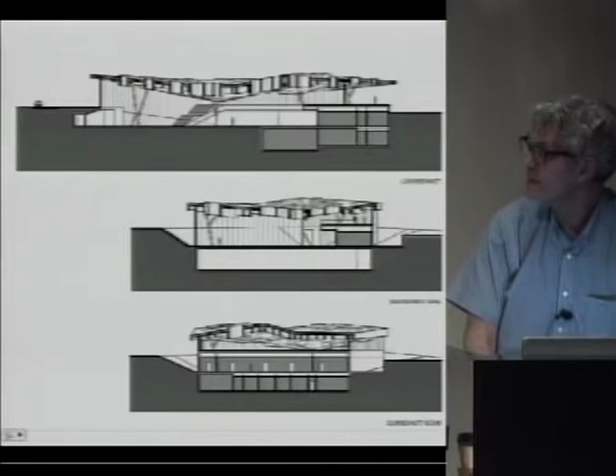The sequencing of the steel's up, and in a few days we could sort of infill the triangles between the steel by putting these cells in, and then skylights and decking that is really very much just a hovering roof over this amphitheater excavated space. And then in terms of the scale of it, the roof is quite thick, sometimes up to, say, 2 meters. So you either have the single height space at the mezzanine or a double height space in the main eating hall here.

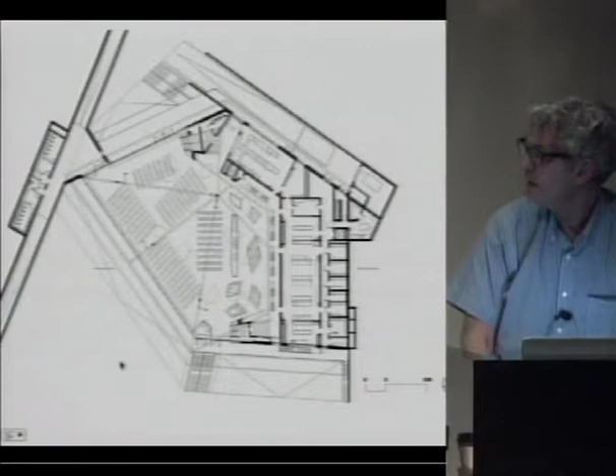The plans are fairly simple. This is the tunnel connection, the entrance by winter, and then a summertime entrance over here, kitchens back here, service stuff over here. And then by sinking the space into the ground, the client gained this mezzanine space here, which they used right away.

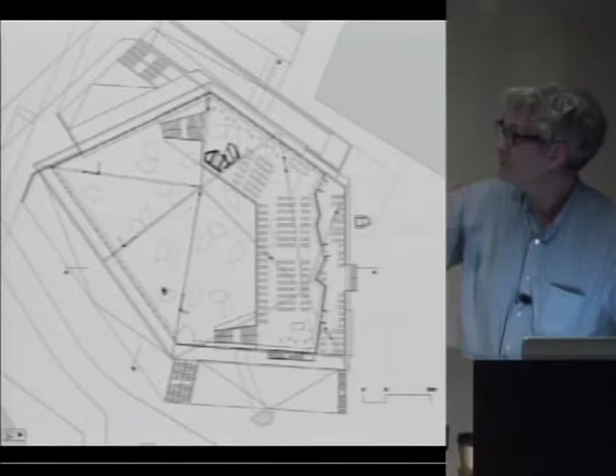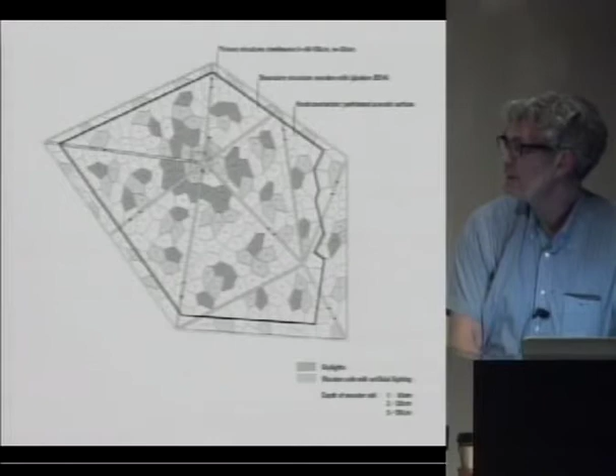We produced these column clusters to stiffen the roof laterally, and then combined that also with a core, elevator core up here. Another thing that happened with this honeycomb idea or the cell idea was to, in a sense, program each one of these, working with our energy consultants. They were either skylights, depending on daylighting position, or artificial lights, or acoustical panels, sometimes both, that gave a functional use to each one of those cells in the structure.

So this is a kind of view in the double height dining space, which again is flexible enough to be used for different kinds of events in the course of the year. We combined that also with a series of precast concrete stairs, which in a kind of landscape way allow the lower level to connect almost as a continuous flow up to the mezzanine space behind it.

So you have either this very high space, or you have a very compressed space here at the mezzanine, where the thickness of the roof is almost the same dimension as the clear height in that area. So you really experience this in a very physical and direct way.

Another sort of project within this was ceramic tile. In Germany, there's several companies that still produce terracotta ceramic tile. In the history of this country, in the early 20th century, many civic buildings were covered in terracotta ornamentally. Of course, Louis Sullivan used this also in places like Chicago. So we were very excited about the idea of producing a custom tile for this building that was in line with the geometrical ideas about the building that we could apply to it.

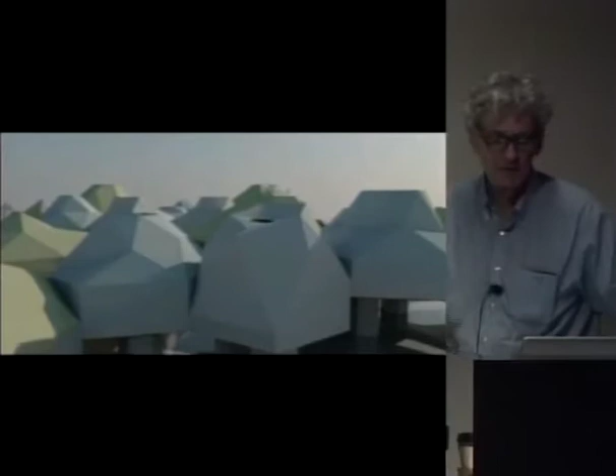In this case, these are tent-like structures that can change by moving the connection points at the ground. It could work as a vertical system, as in Megan's project here, where each flat can open up to the weather, or it can close in this kind of expanded metal-like skin, or in Nacho's project, a kind of space frame with an elastic skin that can move.

You can add to your flat, you can reduce it, you can orient the building to the weather, to the sun, or move it, you can change it. It was thought in detail in terms of a kind of elastic Gore-Tex system. But these were the kinds of projects that resulted, again, from looking at a specific technology and asking how we might use it, which I think is the key to some of the things we've been doing in these studios. So I'll finish with this last image.